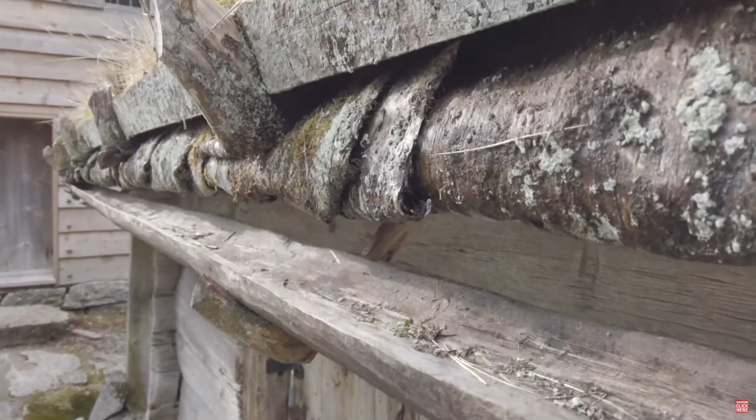If we take a look at this video, we can see and remember that for many thousands of years people used wood to make houses, and basically all houses were made from wood. Which drawbacks can you name, and why do you think we switched from wood to stones, bricks, metal, concrete and other materials, and why we don't use wood as much as in previous times?

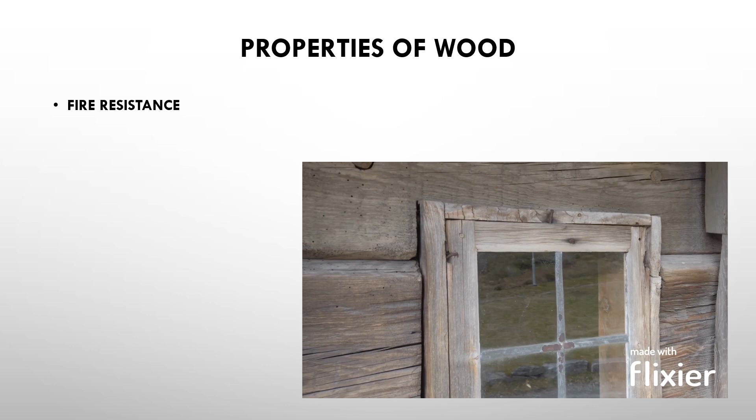So if we would like to name those properties, the first one would be fire resistance, because in the Middle Ages, as you remember from history lessons, if there was a fire in one building, then not only this building burned down, but the whole street or all buildings in that city burned down in just a few hours. So fire resistance is one of the biggest drawbacks to wooden structures that we have to consider.

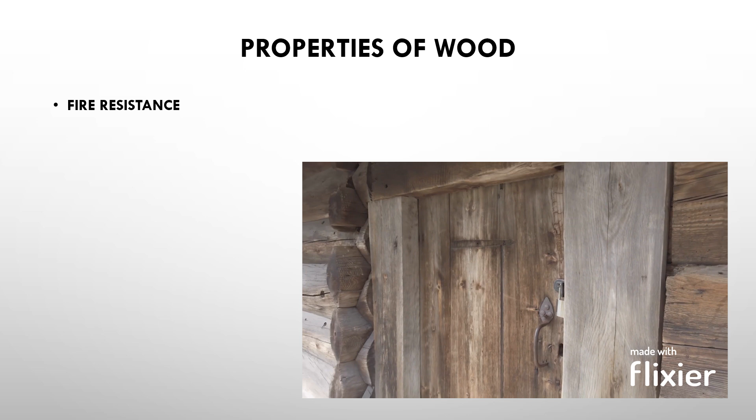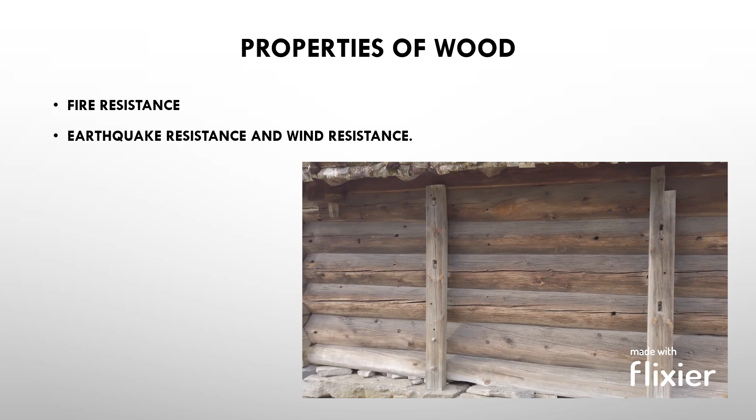Next one is earthquake resistance and wind resistance, because concrete and steel structures are more suitable for buildings that are made in seismic regions, so this is also one big drawback. Now with modern woodworking technologies, it is possible to design and build high-rise buildings in terms of quality, resistance, durability and safety. Those buildings will be comparable with those made of concrete and bricks.

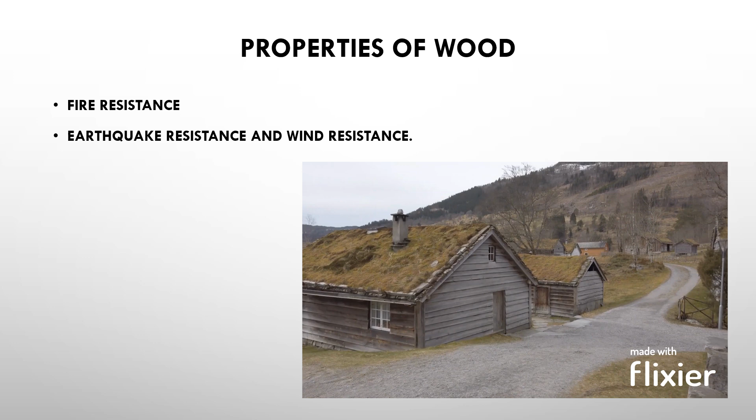But it's important to question how we build, because buildings have such a large impact on the amount of resources that we use. So what do we have to question? Sustainability. Is it sustainable to cut big trees to build some kind of building? Is it good for forests? Is it economically viable? Because if this building will cost 2 times more than a concrete building, where's the point? What are the ecological benefits? And what are the CO2 emissions?

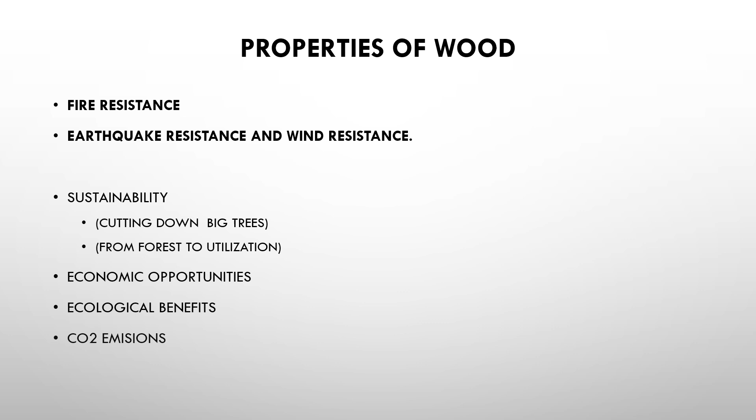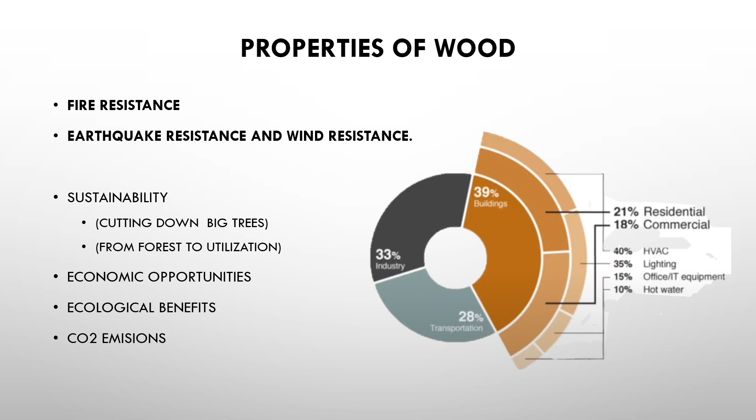In Latvia we have such a policy that if you cut down a tree in the forest, you have to plant 2 new trees instead of it. Of course, some of them won't survive, but others will, and in the last 30 years there has been no decrease in forests in the territory of Latvia. While you are using wood, it is very clean, you don't pollute air and water, and you can use 100% of this material. All leftovers you can use in other projects, or you can make briquettes out of those materials and use them as firewood.

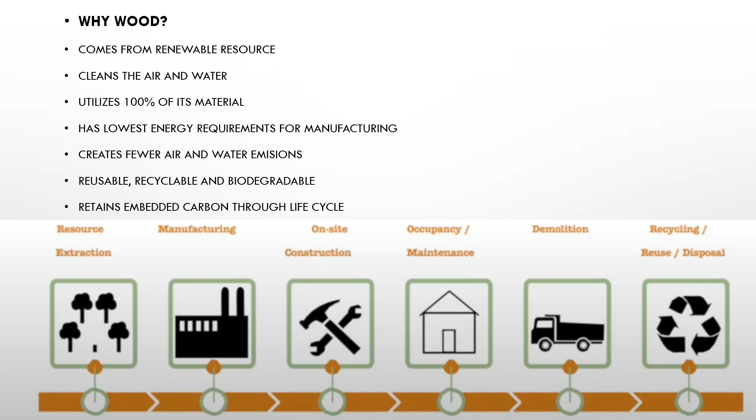And while this piece of wood is solid, in the form of round wood or cut in boards, it contains all the carbon inside it. So it won't release it to nature while it's not burnt or rotten. And if you take a look at that strange table, then you can see the main materials: steel, blue line, brickwork, red line, reinforced concrete, gray line, and this light green color, this is wood.

So if we talk about costs, we can see that steel and brickwork is still more expensive than using wood. If we talk about water pollution, then we can see that with wood you have the least water pollution if you compare it with any other materials.

Deforestation, of course, you have to cut trees if you use wood in buildings. But as we were talking before, if you think sustainably and if you plant new trees, then this moment is not so harmful for the planet. And if we talk about dust, there is no dust when you work with wood, and energy consumption is very low. Any other material will consume much more energy than wood.

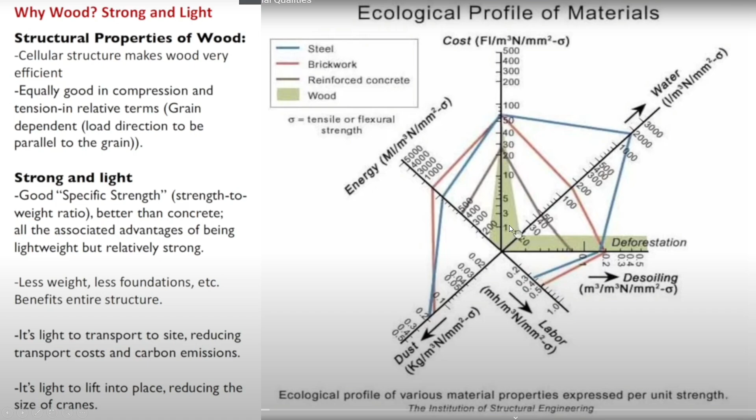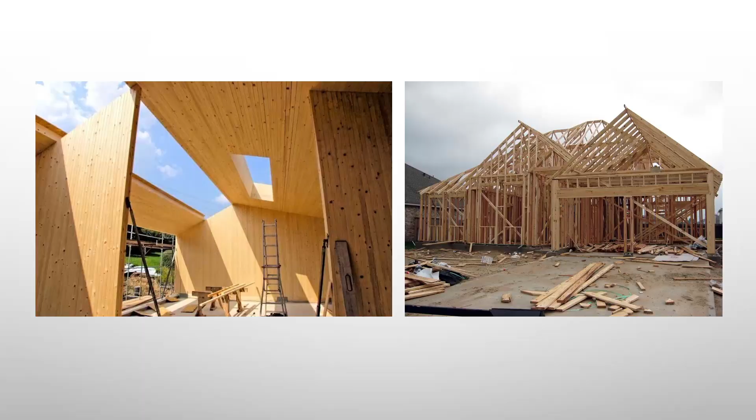After that, we can start talking about mass timber. These are those really big and massive components that are used in our days. If we compare it with wood that we use on a daily basis, like those on the right side, small pieces that are used for home building and other structures, we can think about what happens when it is massive.

How can we shape it? What will be the structural performances of that material? Which construction method do you think gives capacities to make large-scale building projects? And which of them do you think is better in case of fire?

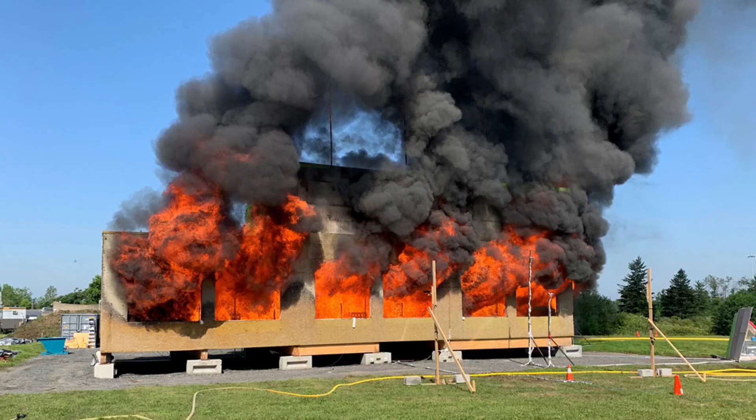Fire is the biggest drawback in wood constructions, so there are a lot of different tests made to test wood properties in case of fire. Studies have shown that wood itself has high fire resistance since it protects itself by charring. Despite the spread of flame for a long time, there is little destruction of wooden structures.

So what can we say? An 18 centimeter thick wooden floor made from cross laminated timber has fire resistance of more than 2 hours. So we can burn it for 2 hours and it will still have its properties.

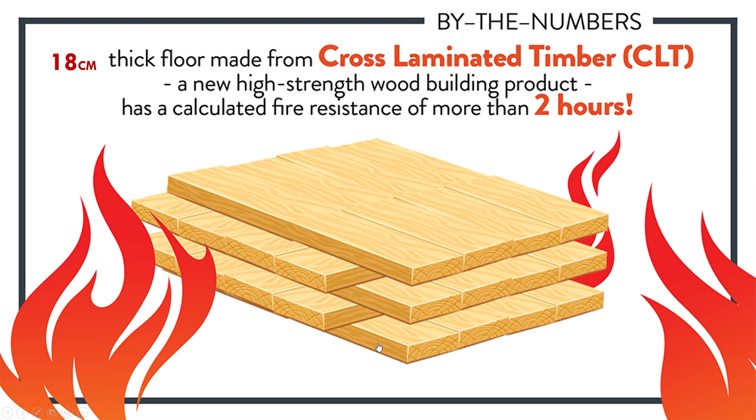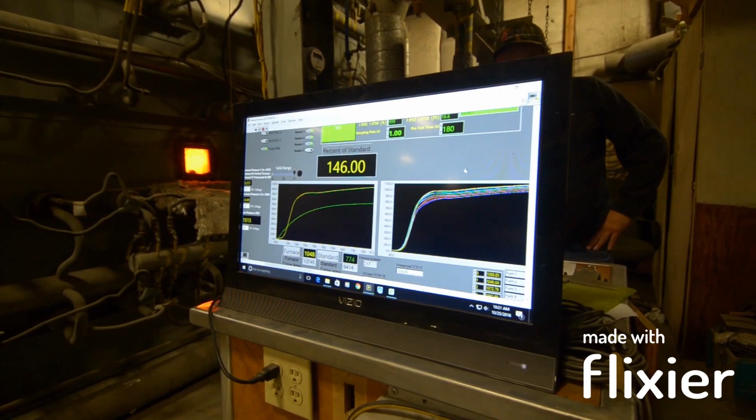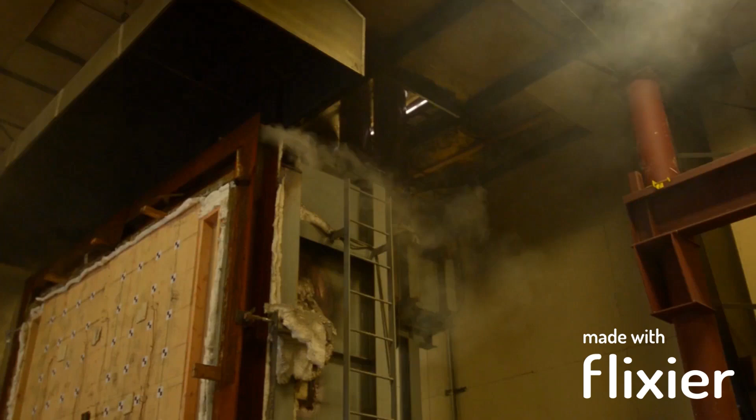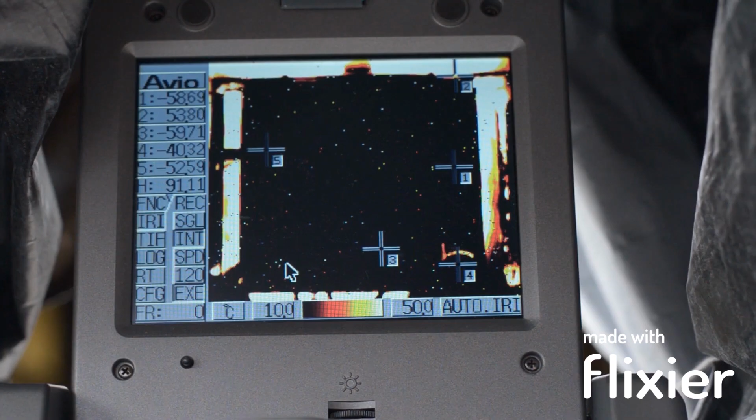Now I would like to show you a test that was made at Oregon State University about wood properties in case of fire. They were testing CLT plates from two different manufacturers. They were planting many temperature detectors in order to understand how the char layer works and how heat progresses through that layer and impacts unburned wood underneath. They used thermal cameras as well to see if there are any hot spots that heat faster than other places.

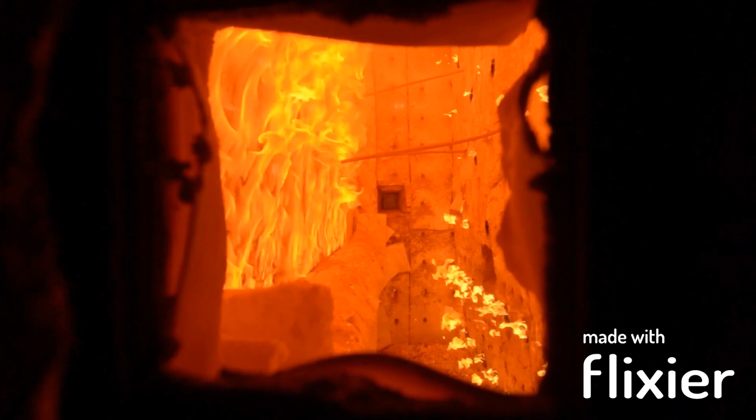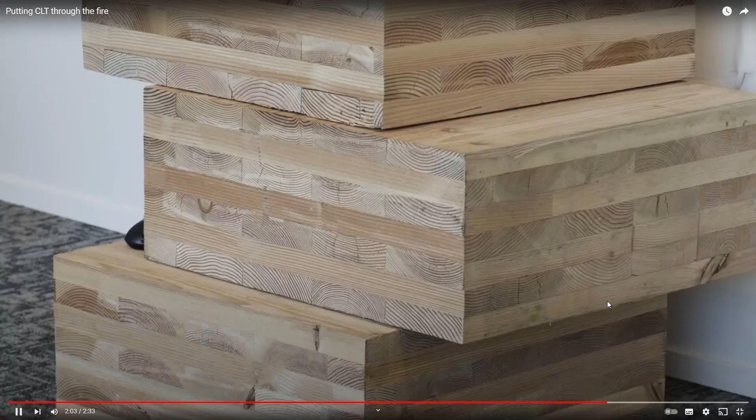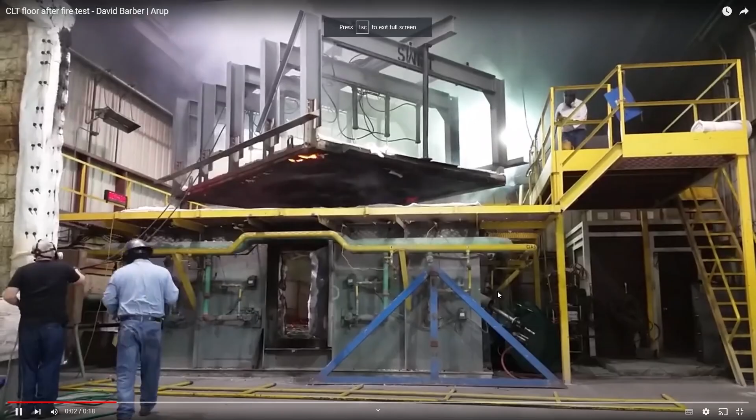And this is a CLT panel in real life. You can see there are no voids between those boards, so fire can't get inside and burn from inside. And here you can see a CLT floor after a fire test in horizontal position.

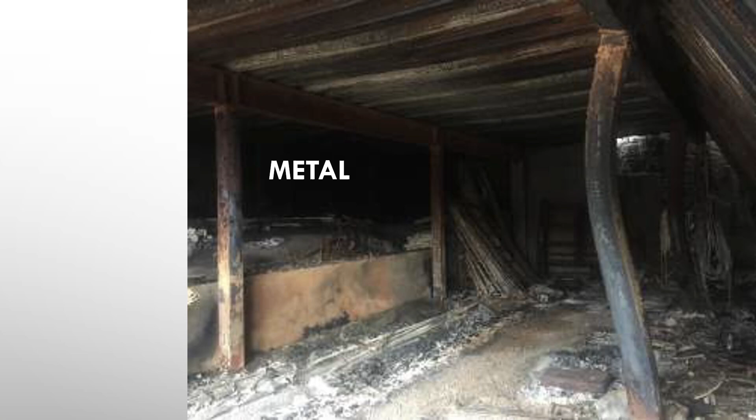Next one is metal structures. In that case you can see that those beams are bent, and I can tell that in that parking place there was a fire that lasted less than 1 hour. Hot air was going through that column because there is a hollow space inside.

This temperature went so high that this column lost its structural integrity and bent under the weight of the ceiling. And if you take a look, there is another column back there, it is bent also. So in case of metal, it also can lose its properties. We can't say that any of those materials is very good in case of fire.

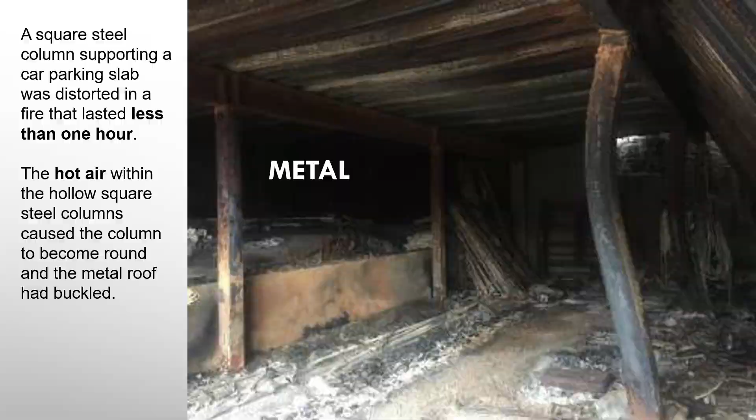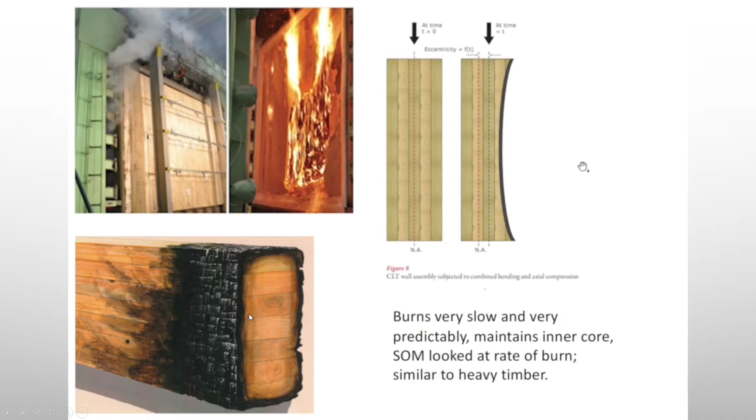What we can conclude when we are talking about wood: it burns very slowly and very predictably, and it maintains its inner core, this part. And as you can see, this char layer here protects the inner core from the fire. If you put wood in fire, it will burn. I'm talking about mass timber. But it will burn while there is wood exposed and there is a burning source.

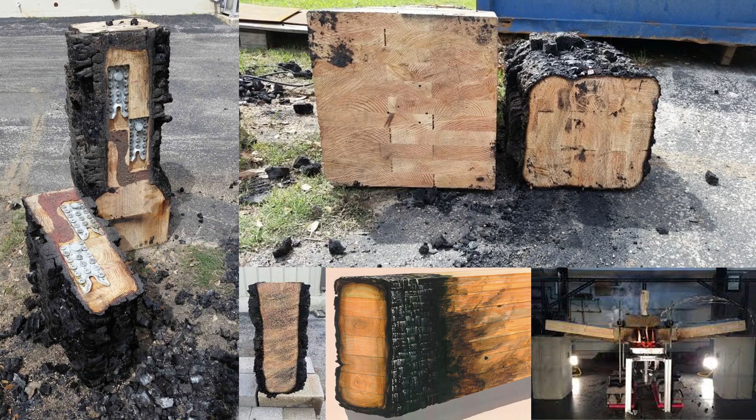So if you take away that burning source, fire for itself will just stop, partly thanks to this char layer that doesn't let fire go deeper. In those pictures you can see the original beam that was tested for 2 hours. It lost a lot of its material, but it still has its cross section.

So if you size the beam for 2 hours or whatever structural safety has to be, it will burn really slowly and a char comes around and protects its inner core. A certain amount of material is going to burn off, but you can size it, so whatever shape is left cross-sectionally still has equivalent structural strength that you need for the building.

So in that case, if this cross-section is still holding the structure together, you can just put a bigger beam and then you are sure that this beam will hold 2 hours of fire without any structural drawbacks. In those cases, you can also see that after 2 hours of fire, all those metal elements are not damaged. And in the case where you can see that this beam was screwed to the ceiling, from that side it is almost untouched.

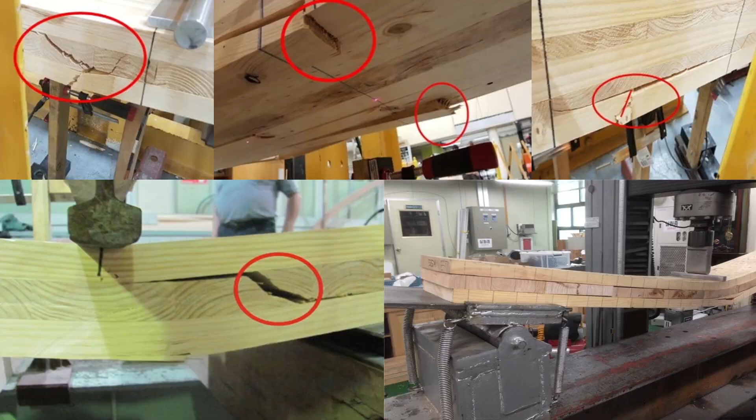And of course there are tests that are made in laboratory to understand how thick this CLT panel has to be to hold all structures that are on top, and what its thickness has to be in case of fire to withstand, let's say, 2 hours of fire and still hold all the weight it has to hold.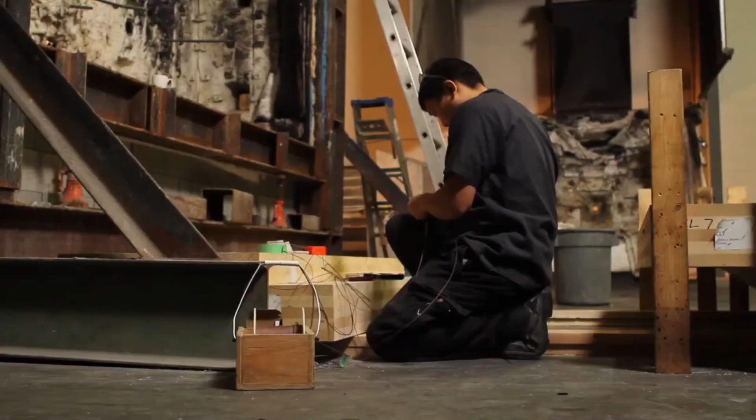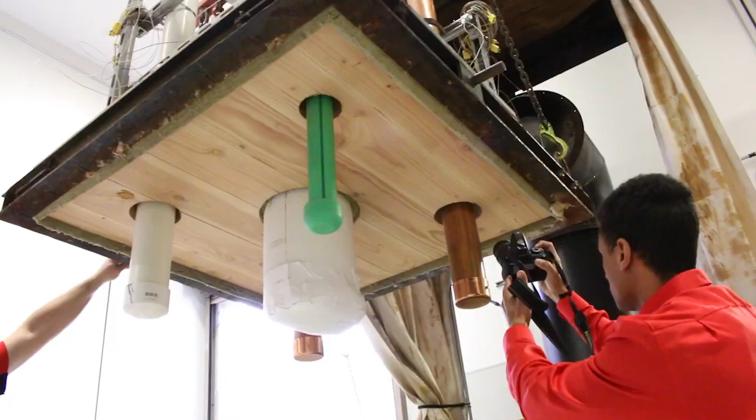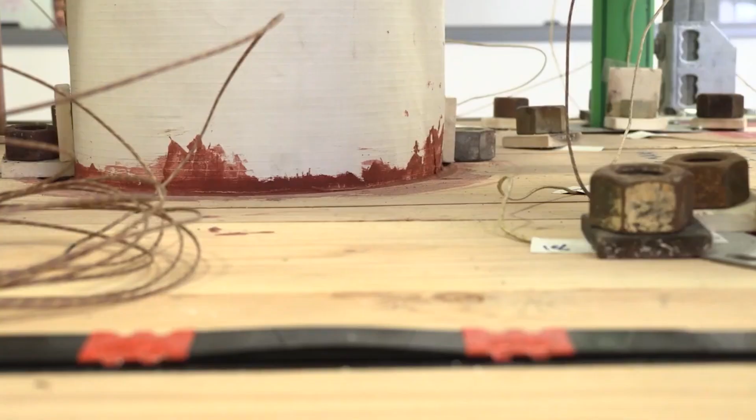I would like to make a little conclusion about this theme. At the moment there is a little lack of knowledge about modern wood technologies. Mass wood has fire resistance properties based on the fact that wood chars, and charring of wood is like a natural protection from fire. And if we compare, steel or concrete is considered non-combustible material, but wood is considered to be a combustible material.

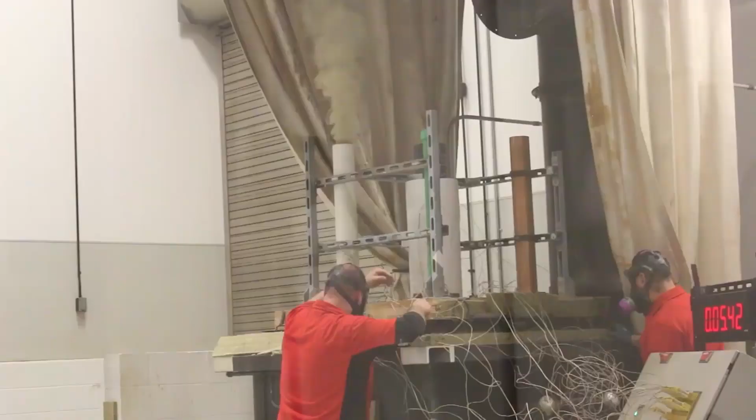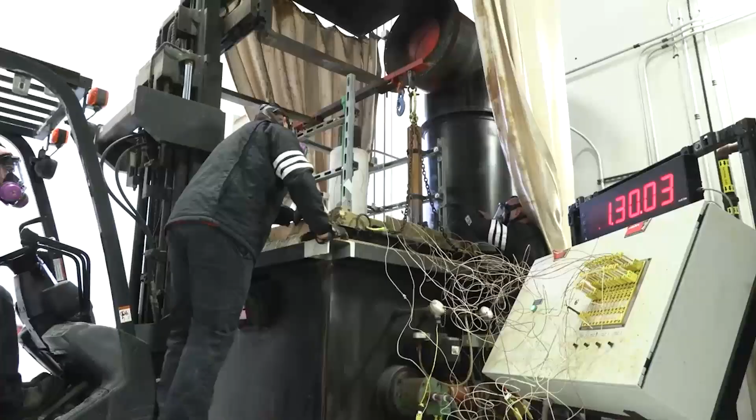But if you compare those materials in their raw form and you don't protect steel or concrete by drywall or paint, in that case wood will outperform steel or concrete. Steel will melt and fail, concrete will lose its structural integrity, mass wood will char to a point and then it will stop. In many cases it's a safer material than steel or concrete.

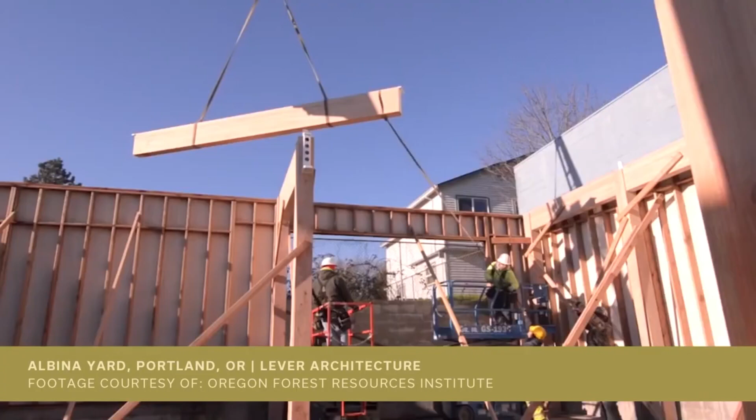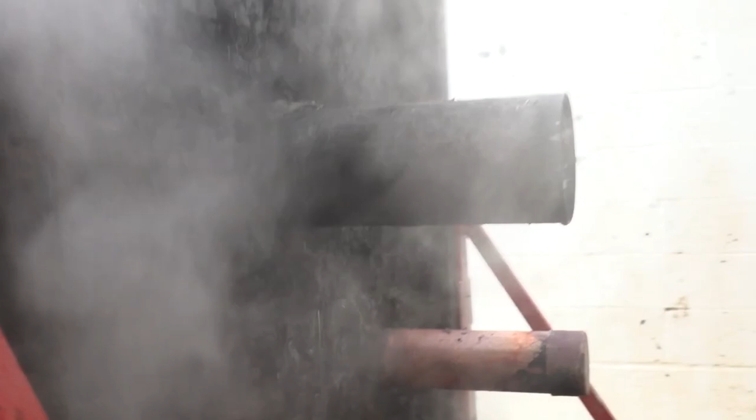Most people's fear of fire and wood has to do with standard 2x4 wall constructions, when we make our houses with those big voids between those 2x4s. In that case, it will burn down in case of fire. But if we have solid timber, we don't have those empty air spaces where fire can go in.

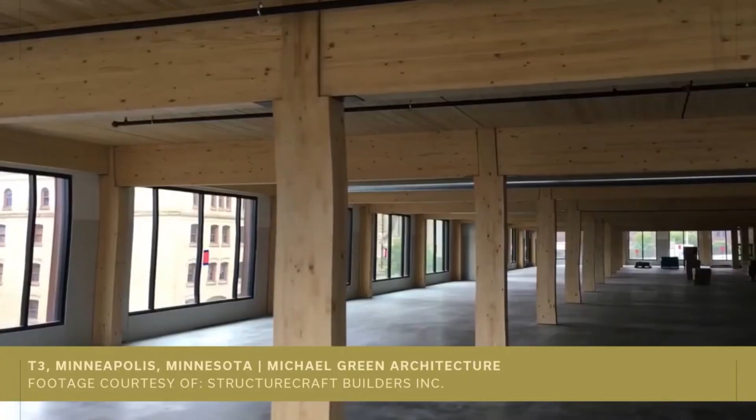This char layer that forms in case of fire is a very predictable and measurable layer that we can include in our measures to understand what thickness of timber we should use in our projects.